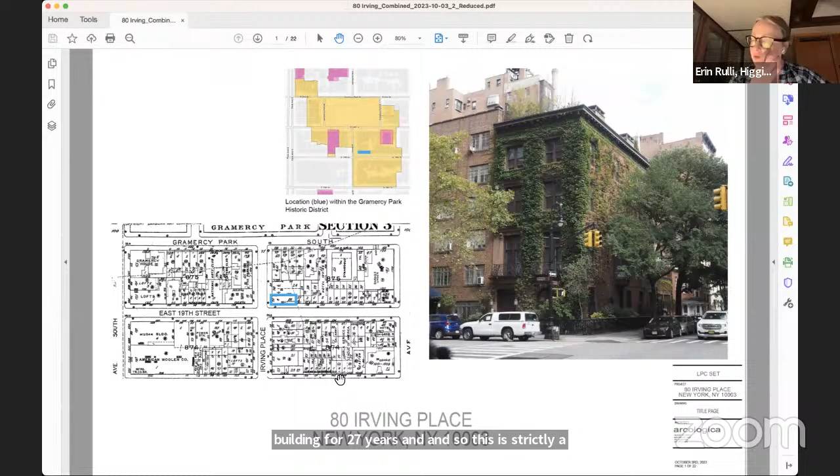It's located on the northeast corner of 19th Street and Irving Place. The scope of work includes a small rooftop addition with limited visibility and some modifications to an existing entry located on a visible secondary elevation on the east facade. We'll take a look at that. All the work proposed today is for the current owner, who has owned and occupied the building for 27 years. This is strictly a renovation for his own purposes, so there's no change in use or occupancy as part of this project.

Here we see the Irving Place facade. On the left is a 1940s tax photograph showing Irving Place. It's 2 bays wide on Irving, and on the right is the existing condition.

Here are a few more overall views. It's of course a corner building, so we have 2 primary facades: Irving Place, that 2-bay wide expanse, and along East 19th Street, a much broader facade extending back to the east. At the top of the building, it's crowned by a projecting cornice.

Along East 19th Street we have 2 very prominent chimneys extending up from the street wall at the primary facade. On the right is a view looking west from East 19th Street. These were slightly later additions to the building—the original volume was expanded by at least 1 bay in the late 19th, early 20th century.

That sort of 4-story section gives you this planar brick elevation here on the return, and then the setback 4-story portion of the building, and this single story at the base, which is currently the garage, with a projecting bay window. This was developed incrementally over time in a series of additions, but the opening we're proposing to modify is situated back here, in the nook or crook of the facade where the two facades intersect, adjacent to that bay window.

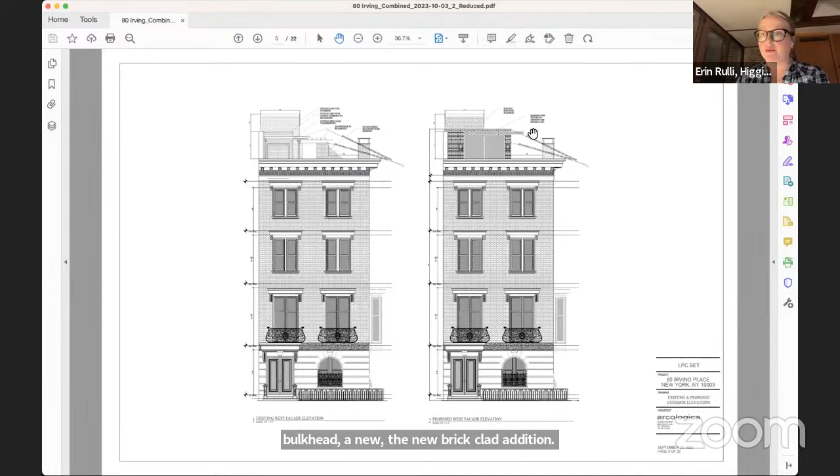Here you can see we're maintaining the existing elevator bulkhead, with the new brick clad addition. There's a brise soleil, a shading device that extends around the edge of the addition, shading the openings and providing some solar relief. That's open work—we'll look at that in more detail—and it projects about 3 feet off the face of both sides of the addition.

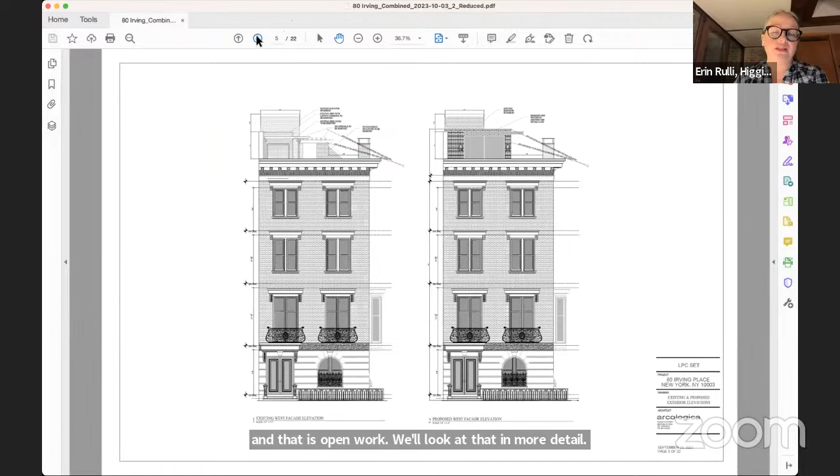Similarly, on the south elevation, the existing pergola—behind it there's a lattice screening wall separating 80 from the building to the north. At the east end of the building we have that pergola system extending all the way back here to the edge of the property, the existing elevator bulkhead, and again those two very prominent chimneys that act as a frontispiece to whatever's happening on the rooftop.

In the proposed condition, the new lattice work at the rear replaces where the pergolas all go away. There's a very simple brick volume of an addition, the existing elevator bulkhead, and the brise soleil. There's an existing mechanical setback that's non-visible, and the mechanical will all be upgraded, but the mechanical location remains the same, with some new screening device there that we see on the right.

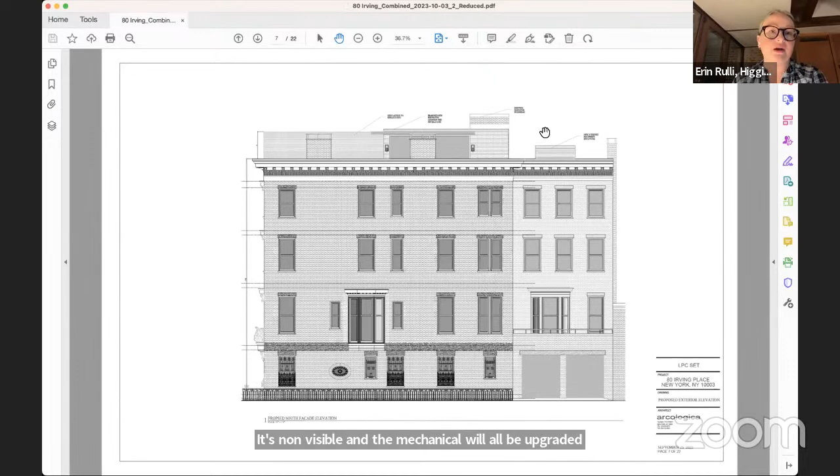This is the south elevation of the building. At the second floor, we can see the existing entryway that leads to the terrace above the garage, and the new proposed entryway that we'll look at in more detail. Up at the rooftop, in the existing condition, we see the canted roof of the stair bulkhead, the pergola system, and the existing mechanical elevator bulkhead. Then, of course, here's the new addition, the penthouse with just this simple brise soleil and the chimneys.

Out at the street wall, in the foreground, this is that mechanical enclosure. So you can see the setback from that front facade.

Here are just a couple of facade details of the proposed addition. It will be executed in a red Roman brick. As we start to look at the visibility, you'll understand that this helps it recede. There's a lot of exposed secondary and rear elevations in the context, so the red brick really mutes the addition and helps it recede into the perspective. The brise soleil will be steel, with a blackened finish. Here's that existing elevator bulkhead, and then there are some ladders that provide FDNY access across the rooftop.

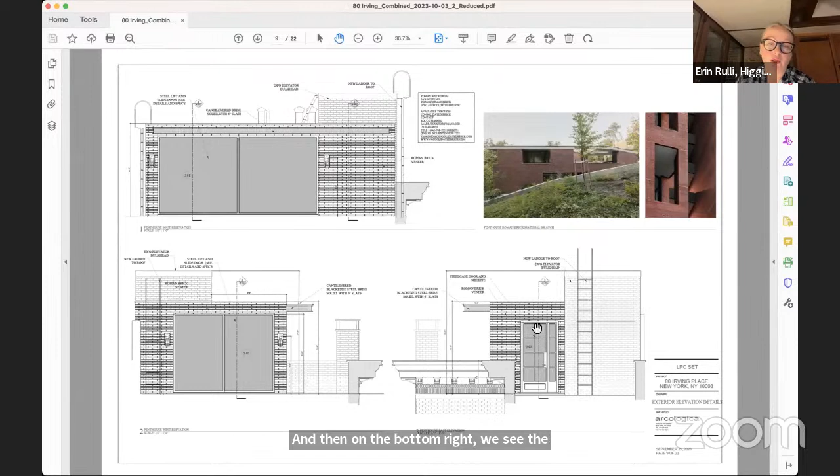Just up at the top right, these are examples of that red Roman brick that we intend to use at the rooftop.

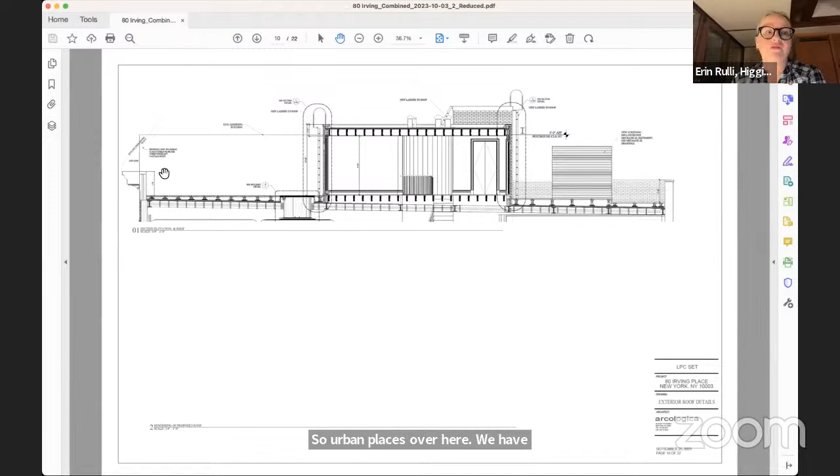Just a section across the roof, to give you a sense. Irving Place is over here. We have approximately 27 feet of setback from the front facade to the facade of the addition. It's a very limited footprint, and then that small mechanical enclosure to the east.

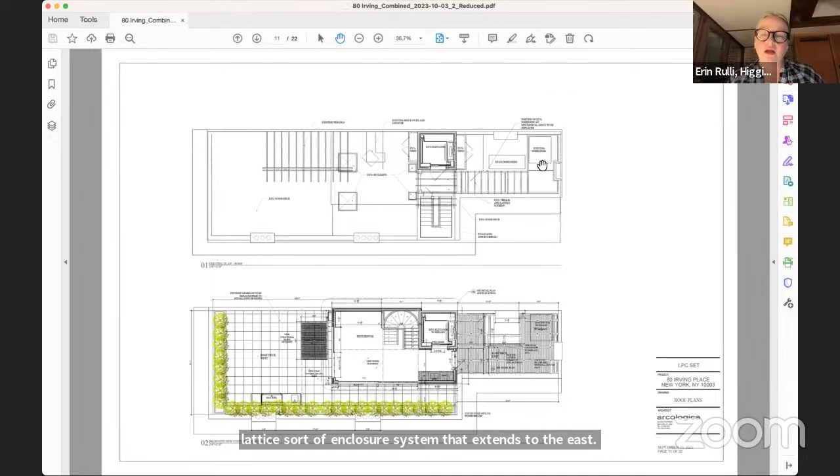Here's the comparative existing and proposed plans. In the existing plan, this is very clear, where you see the existing pergola and the existing stair bulkhead, and then that system of pergola and lattice enclosure that extends to the east, the existing mechanical equipment, and there's a hot tub, a whirlpool, at the northeast corner of the building. So that's all enclosed in that current system.

In the proposed condition, we open up that whole section in front behind the cornice and remove the stair bulkhead. There's the footprint of the addition that engages the existing elevator bulkhead, and then the mechanical area that exists today is repurposed for new mechanical systems.

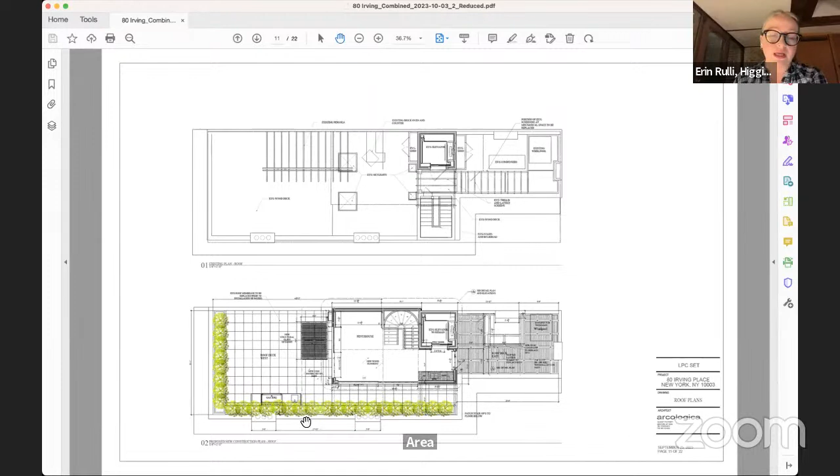We have about a 7-foot setback from 19th Street to the facade of the penthouse, but that is to the interior face of the chimney. Beyond that 7 feet, we have the full projection of the chimney and the cornice, which, as we'll see in the sight line and visibility studies, really helps to disassociate the addition from the building.

This is just the upper roof plan to show you the big moves, the overall volume of the addition, the mechanical enclosure, and then the elevator bulkhead there.

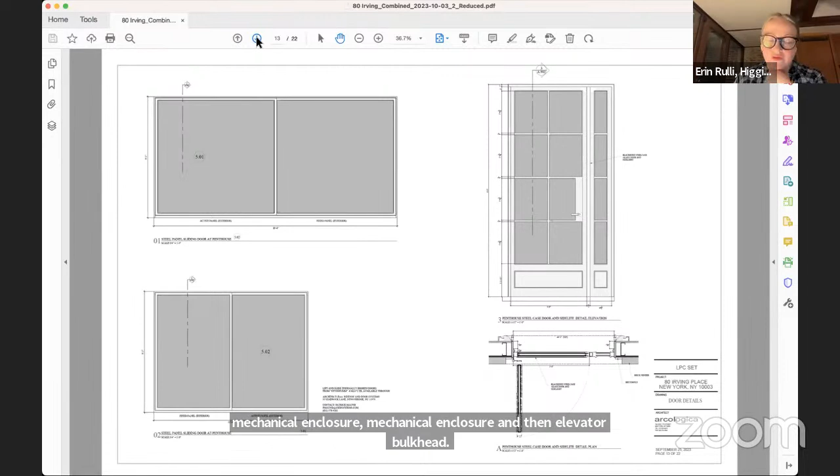Details of the proposed new infill at the penthouse: the sliding unit and the fixed unit for each of the new steel windows, and then that multi-light steel door at the east end.

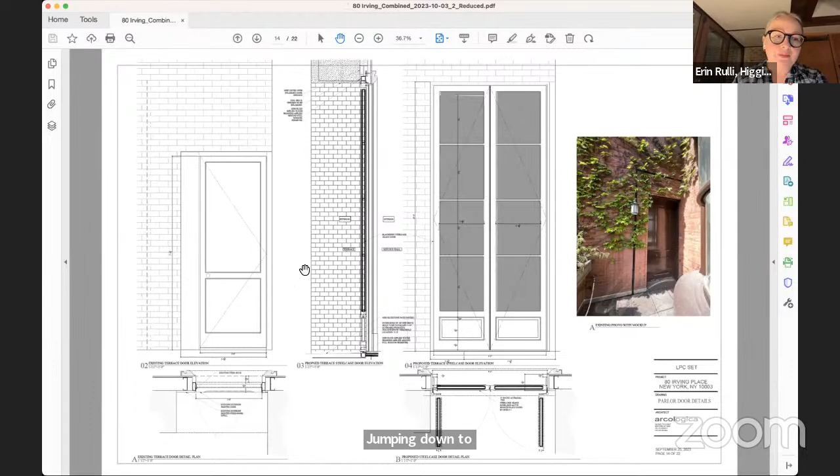Jumping down to the second floor. On the right is the view of the existing door at the second floor. It's a solid panel door within a very deep recess, a sort of planar brick opening within the masonry, with a solid panel door set within that.

You can see a black outline around the perimeter of the door, and that's the proposed new opening as it would be expanded. This is at the juncture of the two walls, the intersection of the north-south wall with the east-west wall at that setback four-story extension.

On the left we see the existing condition. The existing door opening is about 3 feet now, and the proposed is 4 feet, so we're expanding it a foot in width. It's about 7 feet tall, and we're expanding it to 10 feet in height. The concept is to keep it in the same location, just expand it so that it remains in the corner.

You can catch a glimpse of that projecting bay there. So the idea is that it tucks away in the corner and doesn't interfere with the reading of the projecting bay at all.

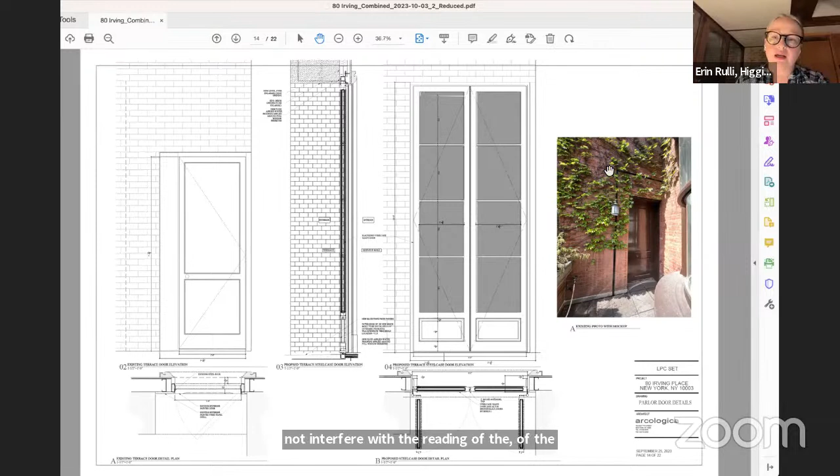It's hard to see in this photograph, but there is a ghost of an old window that exists within the brick patterning here. It's covered with ivy, and this is also above the second floor. It's completely unrelieved, so there's nothing happening, no sort of pattern for us to fall into, or that would distract from or detract from the reading of what's happening above it.

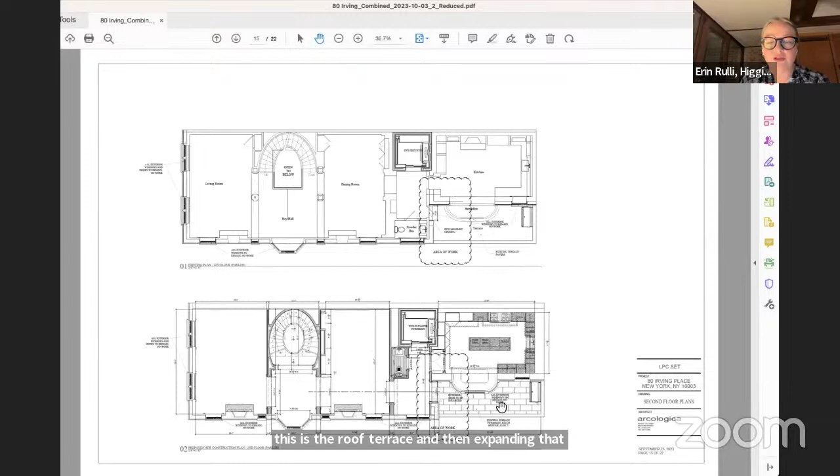Just to see that second floor in plan, that 3-foot wide opening here, this is the projecting bay, and this is the roof terrace. Expanding that opening just by about a foot provides access onto the roof terrace there. Now we're going to take a quick walk around to understand the visibility.

It's in the context of everything happening in the background, this building, the red brick of the building beyond, and behind or beyond the cornice and the chimneys, which act as that sort of frontispiece.

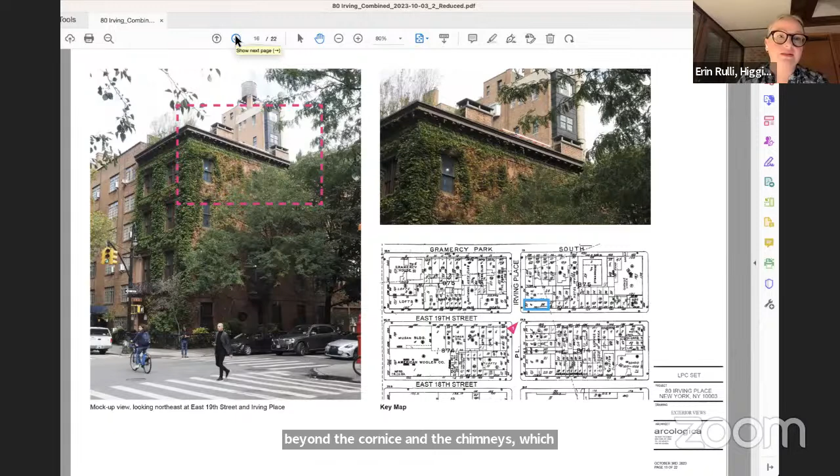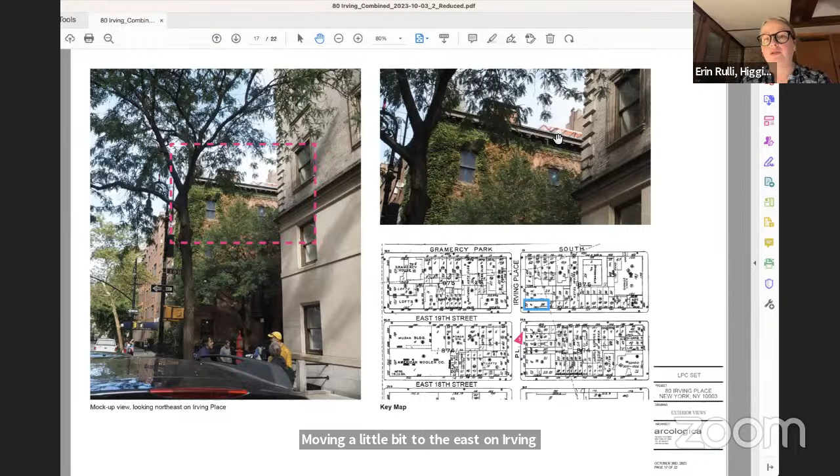Moving a little bit to the east on Irving Place, and looking up at the building just south of East 19th Street, we are going to be looking up through the Brise Soleil. Again, it's open work there.

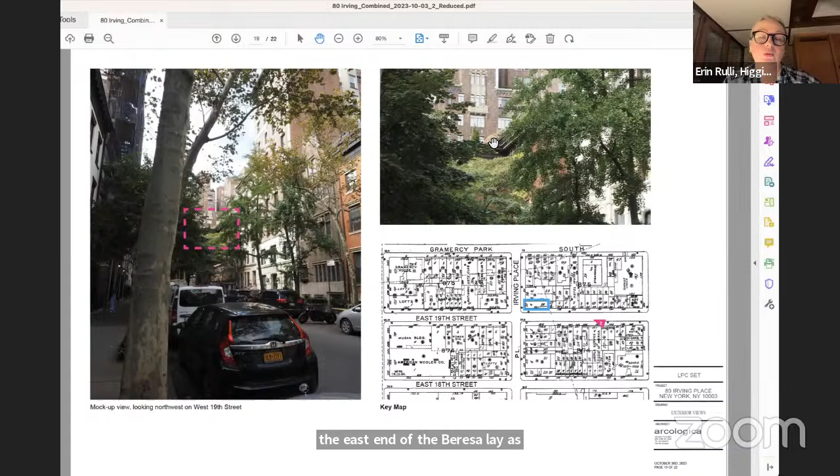Just for the sake of transparency, we've included these two views. These are on Irving Place. There's a lot of obstruction that happens on Irving Place right now. There's a sidewalk bridge, which you can see here, so you can't get a clear view of the building. There's also this sidewalk enclosure for a friend of a farmer, and we have leaf cover, tree cover.

So we expect that there is some amount of a seasonal view that would be perceptible here, but it's going to be similar to what we saw from the viewpoint to the south, where you get some amount of the brick facade at a distance, and then pick up the line of the Brise Soleil.

Here are just a few views of the mock-up as it was constructed, showing the volume of the addition with the Brise Soleil projecting, and around it the existing pergola system and the bulkheads, both the elevator and stair bulkhead.

And then here, finally, a rendered view of the rooftop, showing the very modest footprint of the new addition and the Brise Soleil wrapping the perimeter.

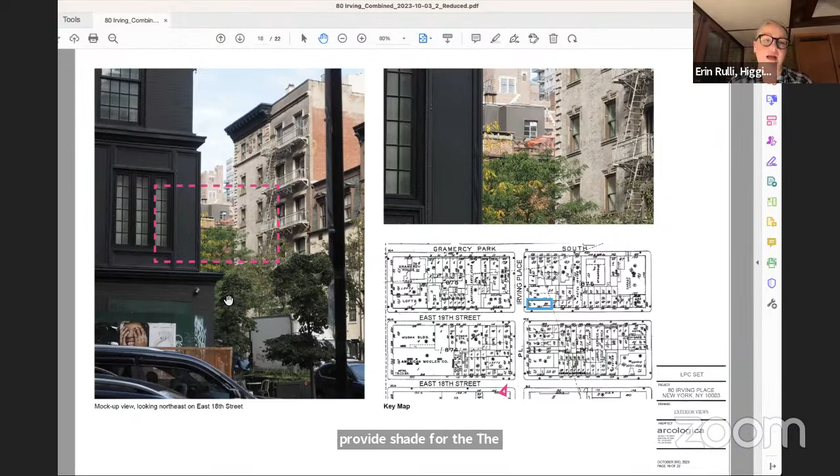I think I'd let Martin answer this. I think the intent of the Brise Soleil is to provide shade for the unit itself, the penthouse, and I don't think there would be any effects on any surrounding property.

Do you—just, I think you're muted. If you can see it, it might be creating shade. Yeah, hi, good evening. This is Martin Sosa.

I'm the architect on the project. So as far as your question about any shadows that would be created, I think given that the orientation of the building is facing south, any shadow would really be behind the structure.

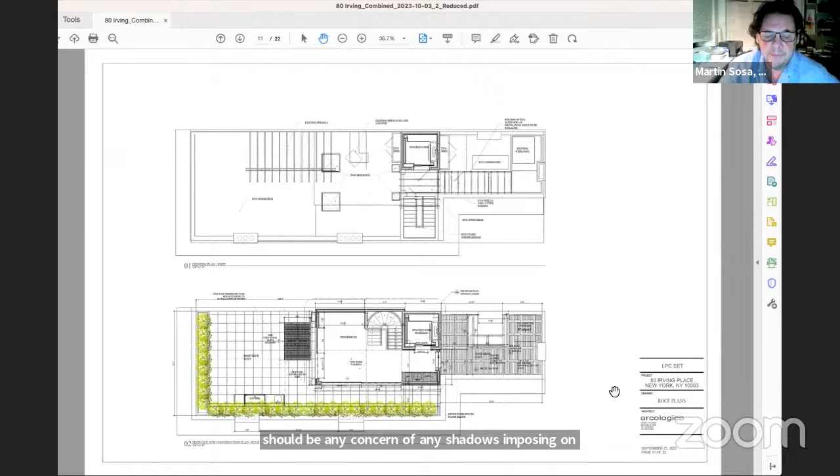Which is basically covered by the taller building. So I don't think that should be any concern of shadows imposing on the street or elsewhere. Okay. Right, because the sun's going to come over this way, right?

And the adjacent building is just slightly taller than us, which you can see in this. So we're sort of coplanar with what's happening at their rooftop.

And I have to say, my second question is, I am sad for that lovely ivy, which I am sure is not going to survive this.

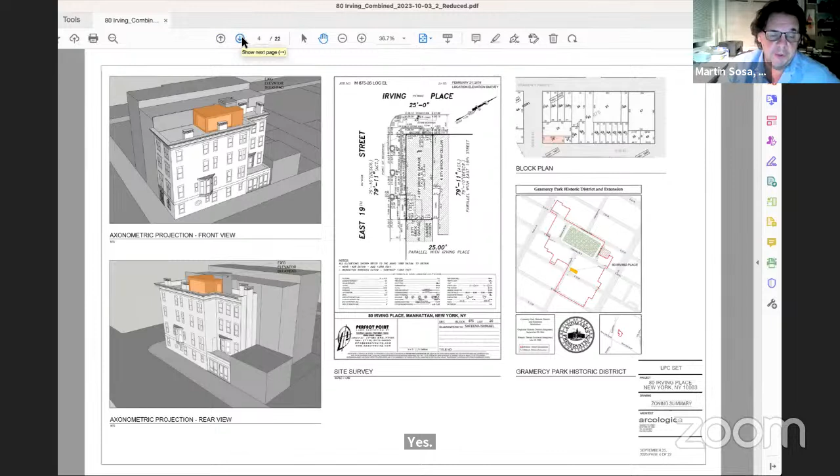Our client, the owner of the building, has resided here for over 30 years, and he's taken pristine care of this property. He's been the caretaker, and he has the best of intent.

I mean, the ivy should be landmarked itself, so there's nothing we're doing that's going to affect the ivy, as it's growing from the street level and not from the rooftop.

A lot of what you're seeing up on the roof in the photos is actually a hydrangea that's been climbing above the chimney, because of the pergola.

I wondered if it was wisteria at first. No, that's all ivy growing up from the street. Yes, and it's not—this is not...

Plan, and we're just going to—we got a question from the public. Can I just make sure one—okay, I actually have two more. One is—okay, you can come back to me. Can you do one, please?

Well, one is noise implications for your neighbors. As somebody living next to a daycare center with drum sets and two years of Local Law 11 work, are there issues about noise? How long is it going to take? Do you have mitigation?

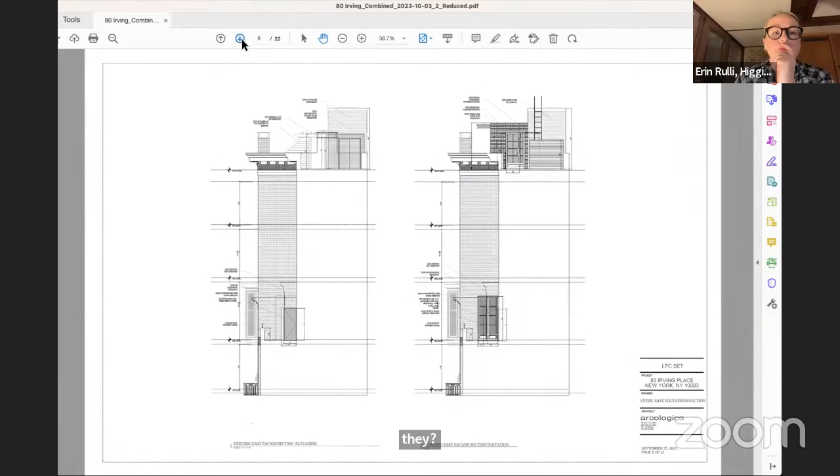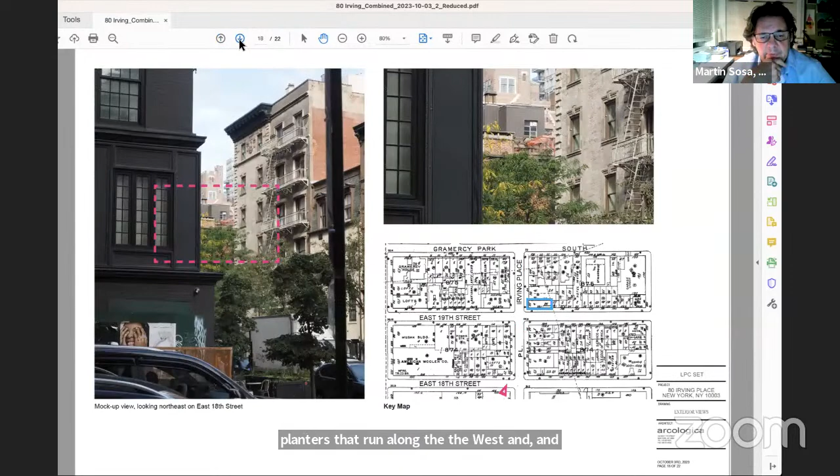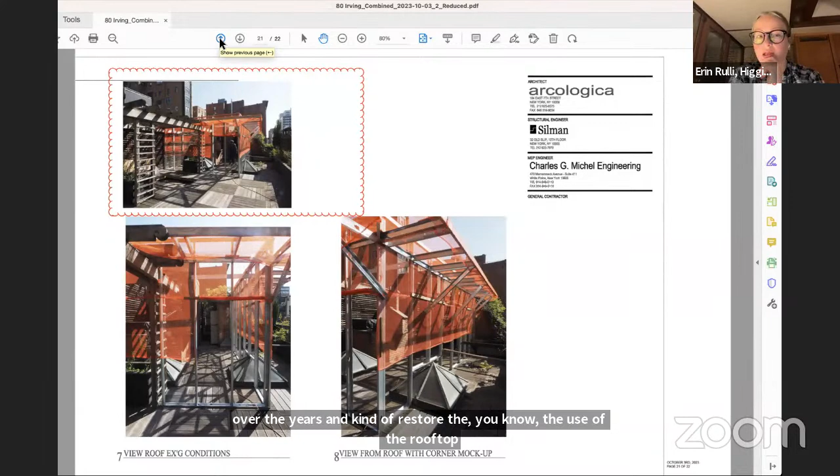There are existing planters that run along the west and south perimeter of the structure, so those are already pre-existing. There were at one point arborvitae that wrapped around the terrace, along with some hornbeams on the Irving Place facade right below the cornice. The intent is to replace what's died back over the years and restore the use of the rooftop, but the planters will not be visible. They're below the parapet line. The parapets are about 48 inches from the top of the finished deck, so the planters are only 2 feet above the deck, so they will not be seen.

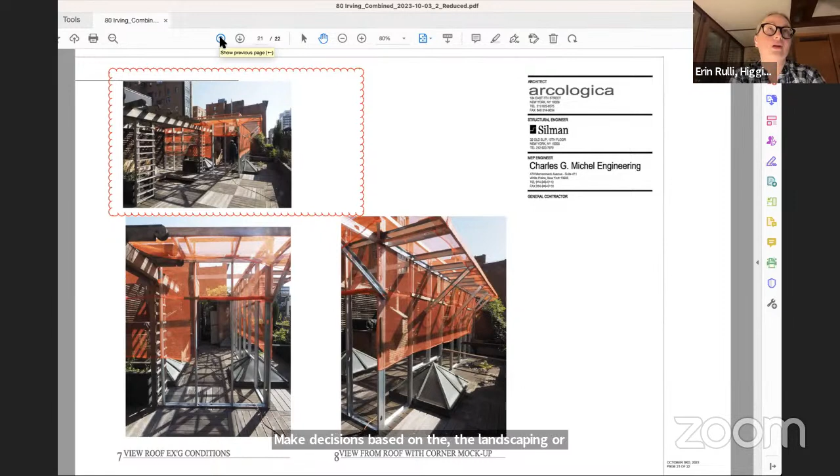In terms of plantings, Landmarks does not review landscaping or regulate planting. So while we show it in our renderings to show intent, Landmarks can't make decisions based on the landscaping or the shielding of views, and they can't require someone to maintain their plantings.

The second question is whether it's Boston ivy or English ivy, and are we sure that it's ivy. I think it's English ivy. I'm not an expert on the type of ivy, but the ivy is not going to be affected at all. We're not replacing windows, we're not washing the facade or the brickwork. The only area that might get slightly affected is where we're proposing the new opening, and there's not that much ivy within that area. It wouldn't be cut back, it would just be pulled back and allowed to regrow and reattach itself.

Are there any more questions from the public? Do our guests have any questions?

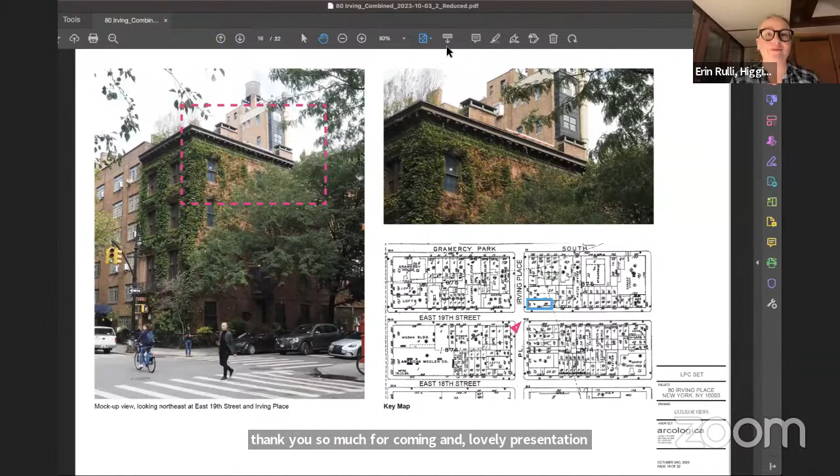Not proposing a motion, it's up to the committee. Are we in support, or would we like to propose a motion of no objection? Should we discuss it first? I mean, it's similar to the art - if we get the art, do they need something official to go to Landmarks? Support, or? And then forward. I mean, we're all fine with it, right? Do we want to support it or have no objections? No objection, I think. Support, no objection, I think.

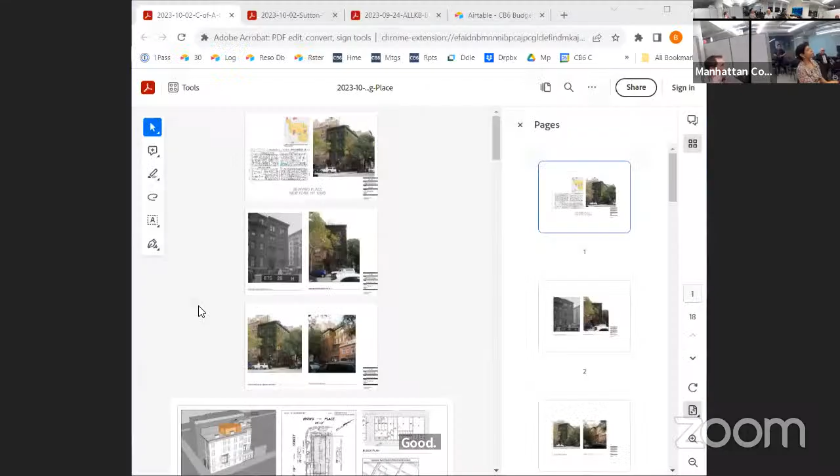Good, want us to just do it from here and speak up? Brian, would you like to stand or how would you like to do it? Yeah, if you could come up to the microphone, because they won't be visible. Okay, I can do that.

All right, Mr. Chairman, members of the committee, thank you very much for giving us the time tonight. I'm Chris Collins, I serve on the board of Sutton Place Parks Conservancy, and as mentioned I'm one of the vice presidents. The Conservancy has not come to Board 6 before, even though we have friends on Board 6, but we're very happy to be here tonight.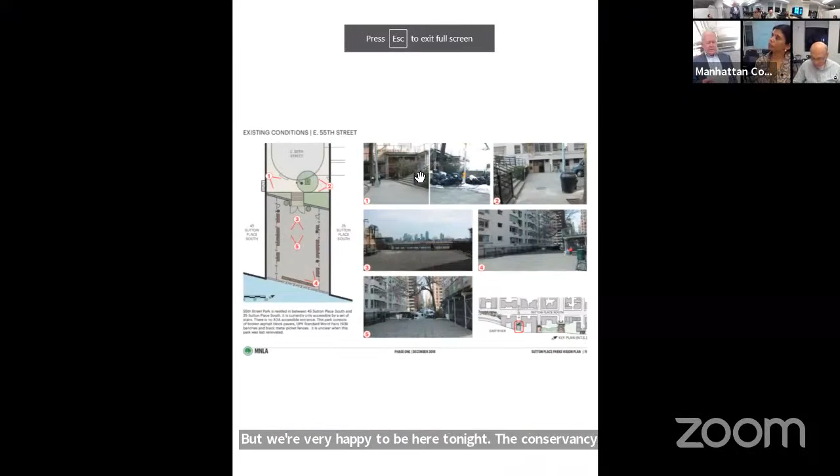The Conservancy was incorporated in May of 2015, and it was led by Pat Charlin Taylor, who's currently the president, Jack Barnett, who was the initial president, and the late Flo Kelly, who I know some of you knew. Shortly thereafter, the board was joined by Daniel, who's our treasurer, and Carol Barry, who's our secretary.

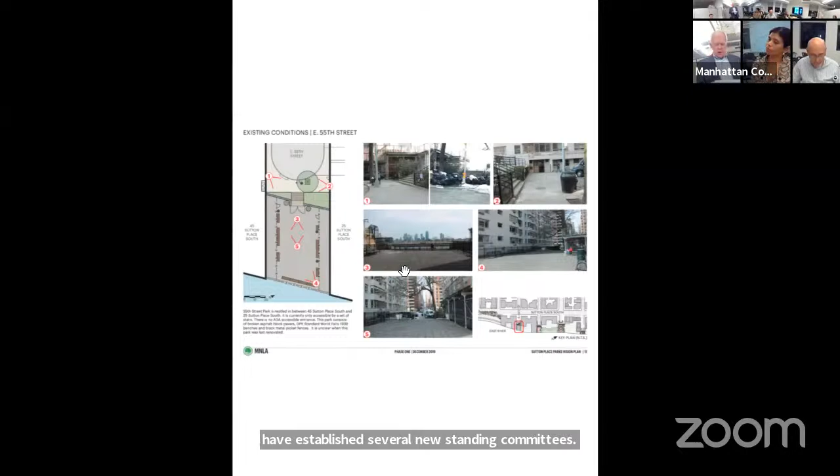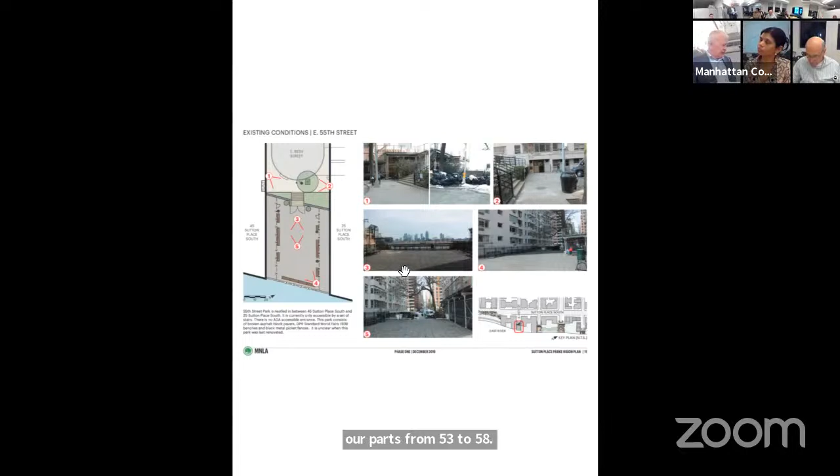The organization has grown significantly in recent years, and we recently increased our board to 15 members and have established several new standing committees. We also have a cadre of volunteers who work on all 6 of our parks from 53rd to 58th. They do planting and weeding. We have paid for irrigation systems and security cams.

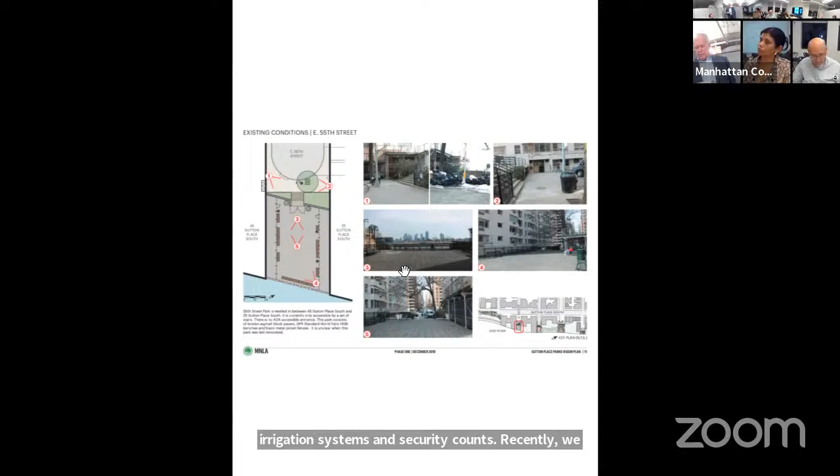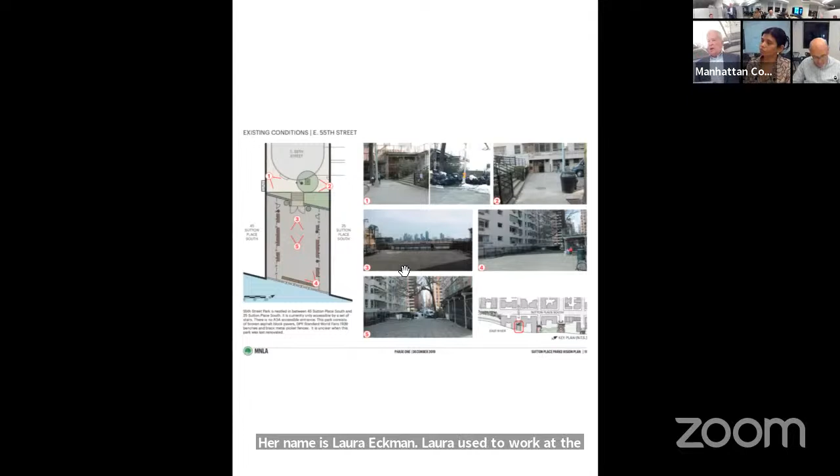Recently, we hired our first full-time employee as an executive director, her name is Laura Eckman. Laura used to work at the Riverside Park organization for Dan Garodnick, who all of you guys know. Prior to that, she worked at the Central Park Conservancy, so she understands parks vis-a-vis the Parks Department, and she has a degree in botany. So it's a big boost for us and less work for some of our officers like Daniel and Pat.

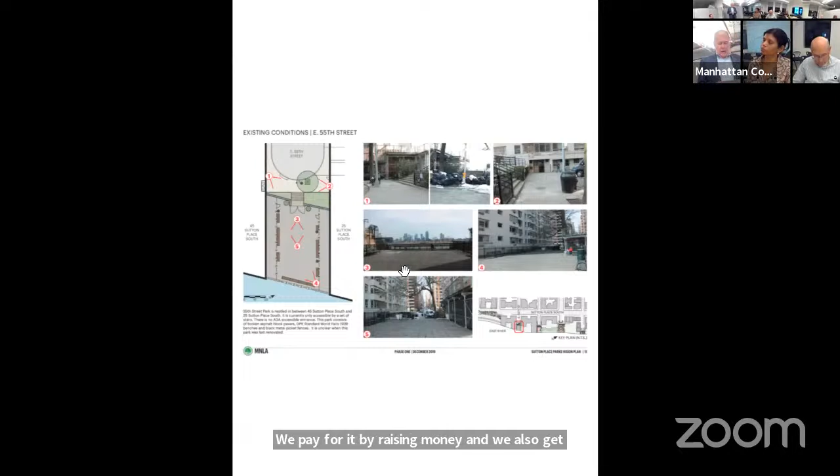I'll just quickly run through some of our programming that we do in the course of the year. It's all free, we pay for it by raising money, and we also get sponsorships from local businesses. In the summer, in August, we have children's storytelling once a week, the same day of the week. We've had as many as 80 children and their caregivers come for storytelling.

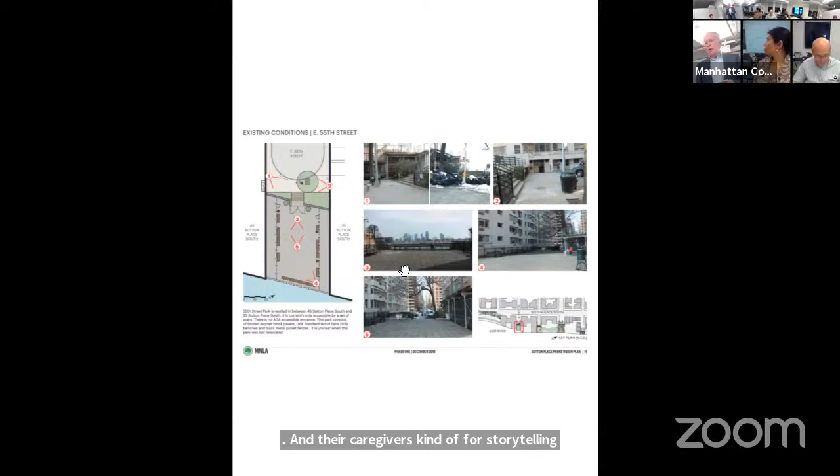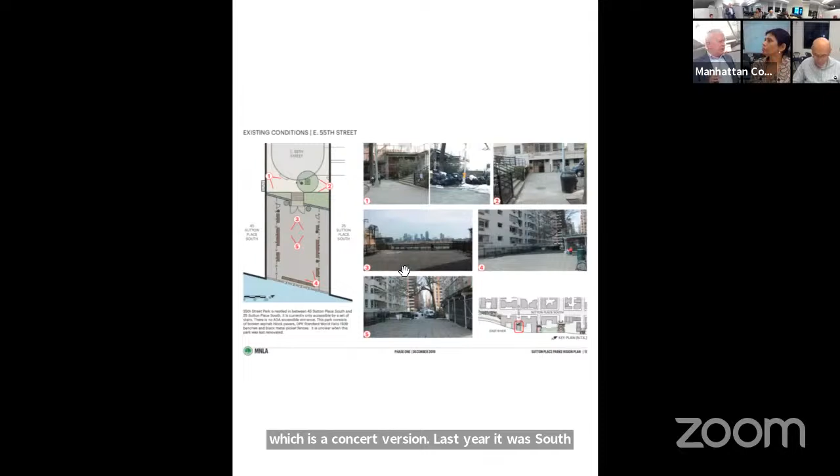The last 2 years we have done Broadway on the River, which is a concert version. Last year it was South Pacific, this year it was My Fair Lady. I don't know what we're doing next year, but try and reserve tickets far in advance. We had a 28-piece orchestra and more than a dozen singer actors, it was wonderful. We do a holiday sing-along in December.

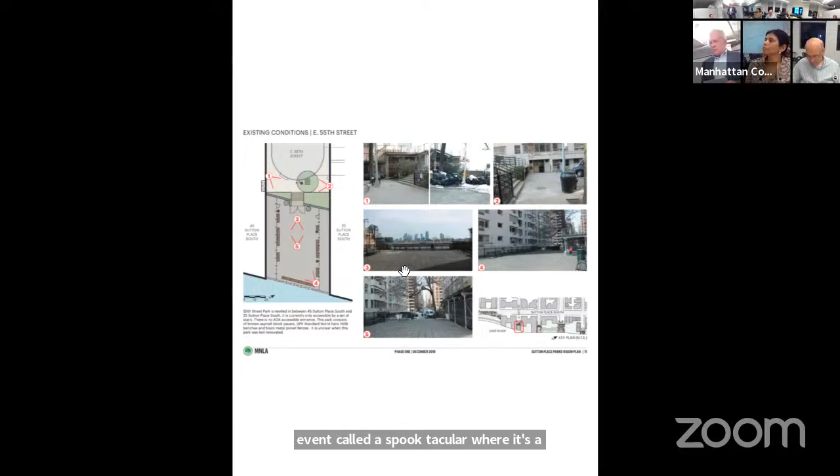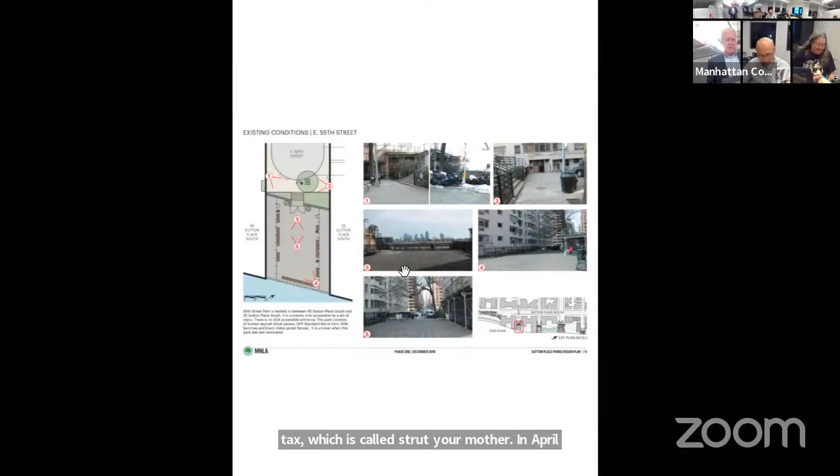For Halloween, which is coming up, we do an event called a Spooktacular, where it's a children's costume parade, and then a separate parade for people's pets, which is called Strut Your Butt. In April, we do Earth Day, which is heavy on educational materials for children. And then in July we do Manhattan Henge, that's when the sun lights up on 57th Street, and we just come out and have a party. People bring ladders and try and take fantastic pictures.

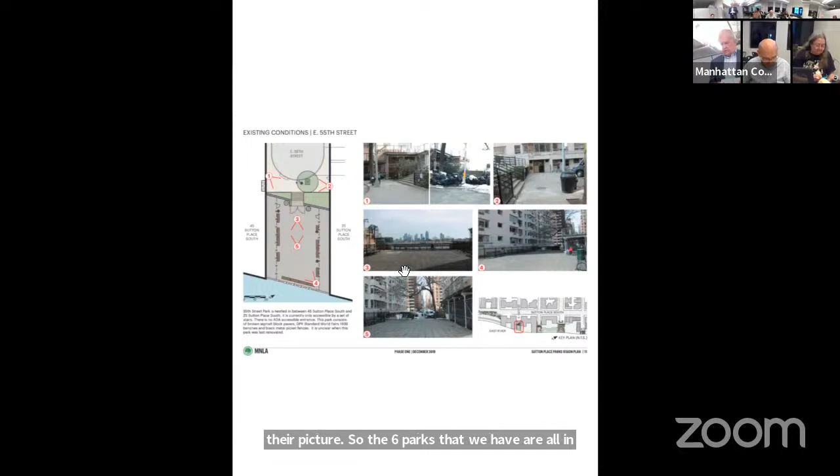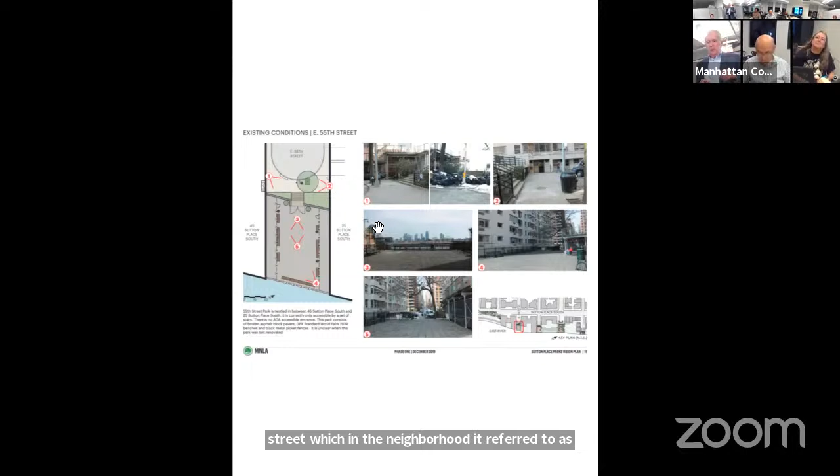So the 6 parks that we have are all in relatively good condition, I'm happy to say, and I thank the Parks Department for a lot of that work. But we have one, it's the dead end or the cul-de-sac, if you want to be fancy, at 55th Street, which in the neighborhood is referred to as the jail yard. There's a picture of it in the materials we brought you today. It attracts some, let me just say, undesirable elements. People who have recently thrown a park bench into the East River from that vantage point, lots of smoking of cigarettes and weed.

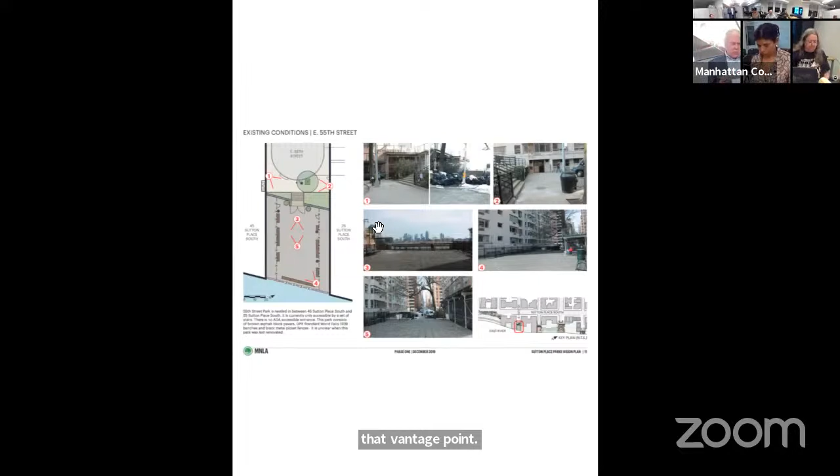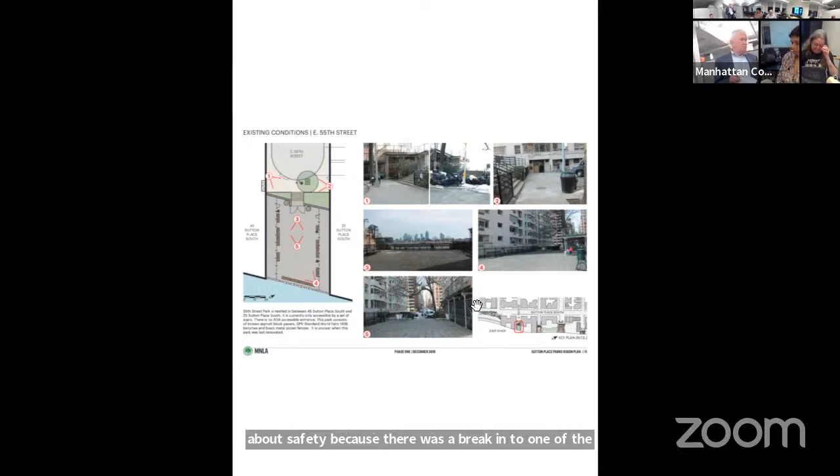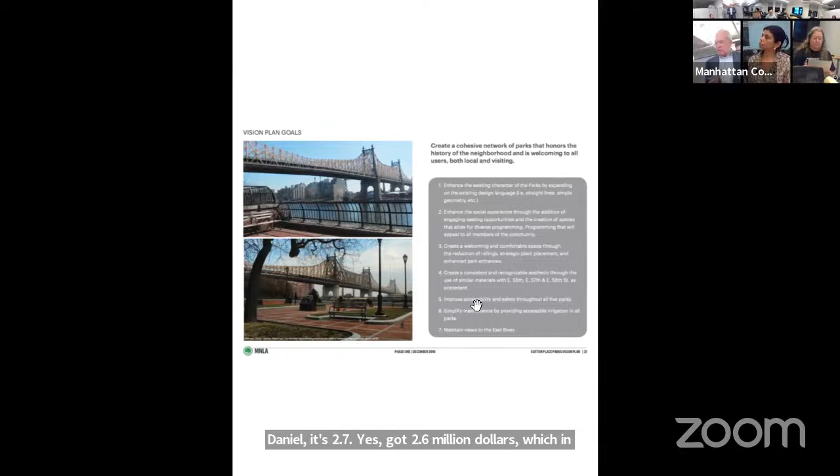The 2 buildings on either side, 25 and 45, are very, very concerned about safety, because there was a break-in to one of the buildings from the park just about a month ago, maybe 6 weeks. So we're coming to you tonight to ask for the board's support in our request, which we have submitted to the Parks Department for approximately 2.6 million dollars. Daniel, is it 2.6? Yes, about $2.6 million, which in the world of parks capital projects is not a huge number, as you guys know. Sounds like a lot of money to me, but I'm going to ask Daniel to come and give a presentation on the particulars for this capital budget request. And thank you again for having us.

All right, thank you. Thank you.

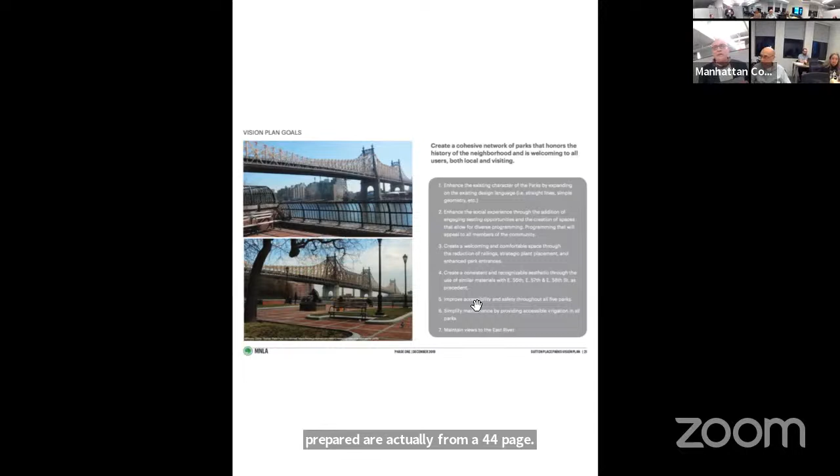The slides and the pages we prepared are actually from a 44-page vision plan that was prepared, and just a little background about how that happened.

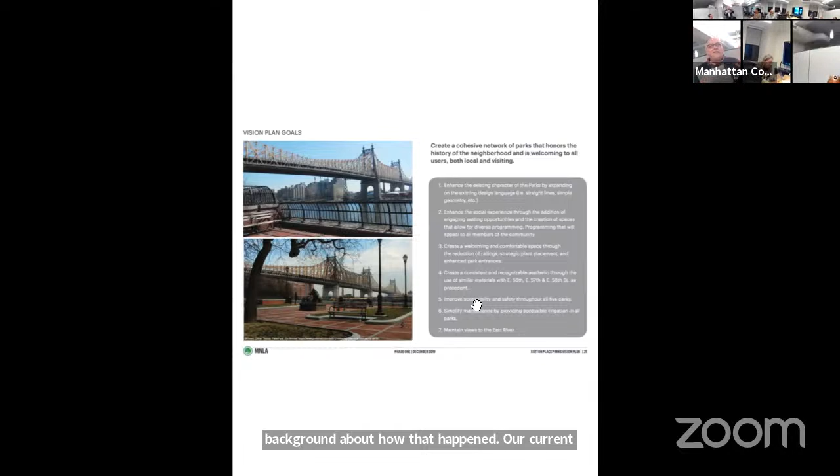Our current president, Patricia Charlin Taylor, had the vision and desire to hire the best landscape architect that she could find, and find a way to take these 5 parks and give them some kind of integrity, so that no matter which one you're in, you feel that you're in a Sutton Place Park.

So she connected with Signe Nielsen, who at the time was president of the Public Design Commission, and is the founder of Mathews Nielsen Landscape Architects, and discussed it. She then encouraged us to set up an ad hoc vision committee.

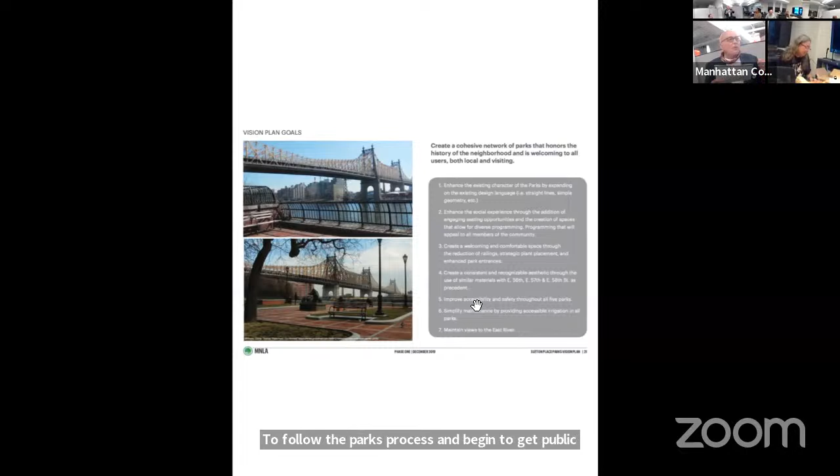15 people got together, and it lasted for almost 2 years, this committee, to follow the parks process and begin to get public input through questionnaires, through guided interviews with a form that volunteers would have on It's My Park Day, to collect data on what people are doing in the parks and what they want to do in the parks. And then miraculously, money we had been looking for years.

Adam Novak left an endowment in honor of his wife, Branka Novak, but we couldn't find the money. Then we got a call from the City Parks Foundation. We've had this money for 20 years, but we didn't know, for the parks to take care of them in perpetuity, but we didn't have anyone to connect to. And so suddenly, it had grown, it was $80,000, now it was 200,000.

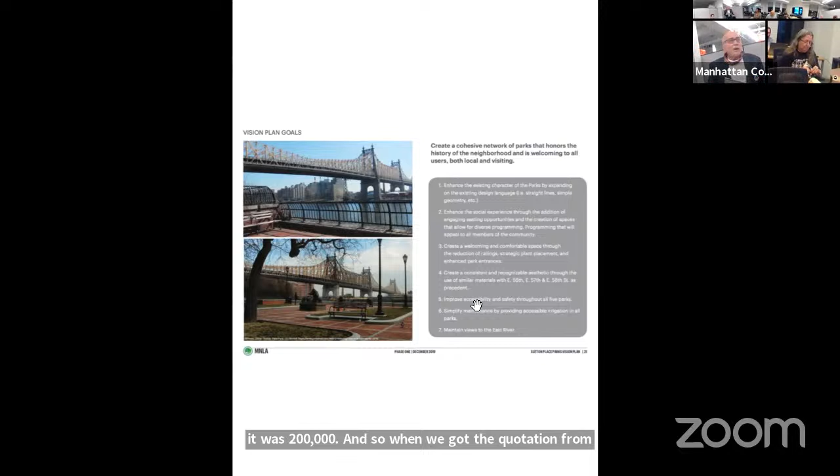So when we got the quotation from Mathews Nielsen to do this entire process, it was going to cost $110,000. We went to the Parks Foundation and said, we think this is the way to perpetuate the parks. And they agreed, so we only paid the first part to generate this quotation.

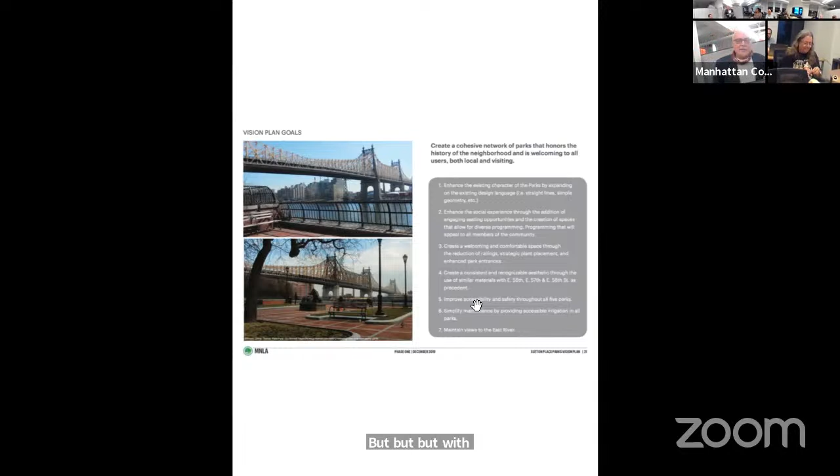And then we received this wonderful money that in a sense is ours to spend. I like keeping it with them, because if it's with me, it's just going to be in a CD at up to 4%, but with them, it more than doubled because they invested it. So it's fine that they keep it and that we have to actually ask and convince them.

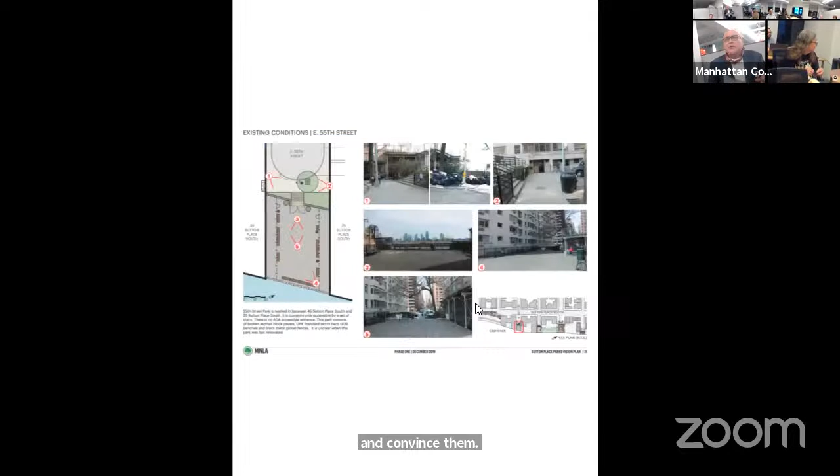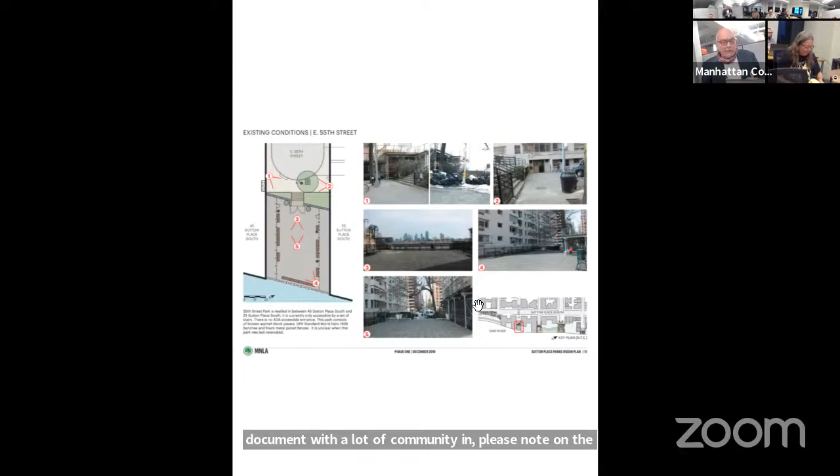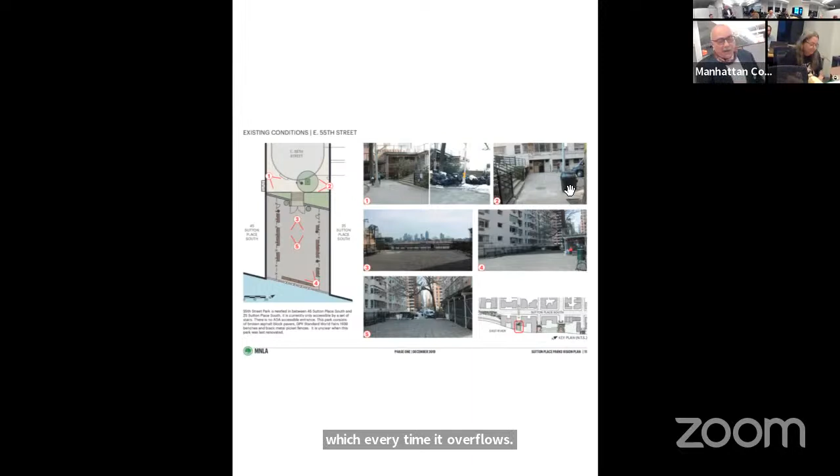The first slide that you saw, so we produced this document with a lot of community input. Please note on numbers 1 through 5, there is a garbage problem. In the first picture, you'll see Cannon Point North and Cannon Point South, otherwise known as 25 and 45 Sutton Place South, have to stage their garbage in this cul-de-sac before it's picked up. In addition, we have this open can in picture number 2, which every time it overflows, we have a rat infestation problem annually in the 2 gardens on the 2 sides of the staircases.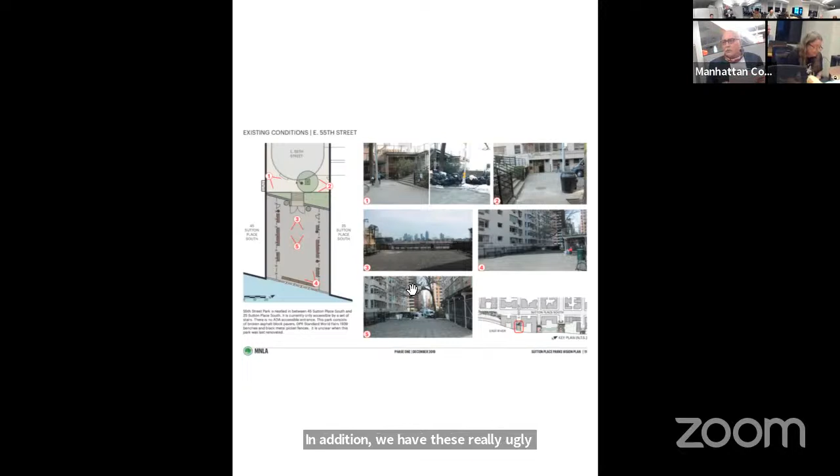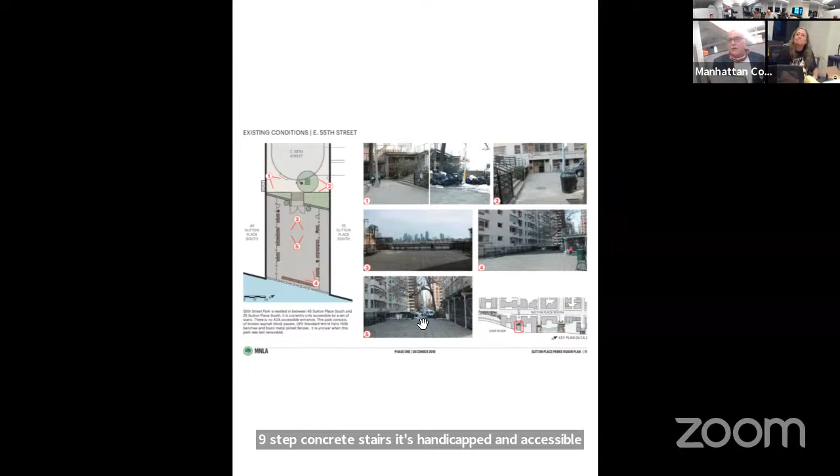In addition, we have these really ugly pavers that we're not allowed to cover or do anything with because of the 9-step concrete stairs. It's handicapped inaccessible. So what we've done since these pictures is put 10 fiberglass self-watering planters that are very hard to move. So at least there's some greenery and some summer flowers, but it's just a stopgap until we can really do something.

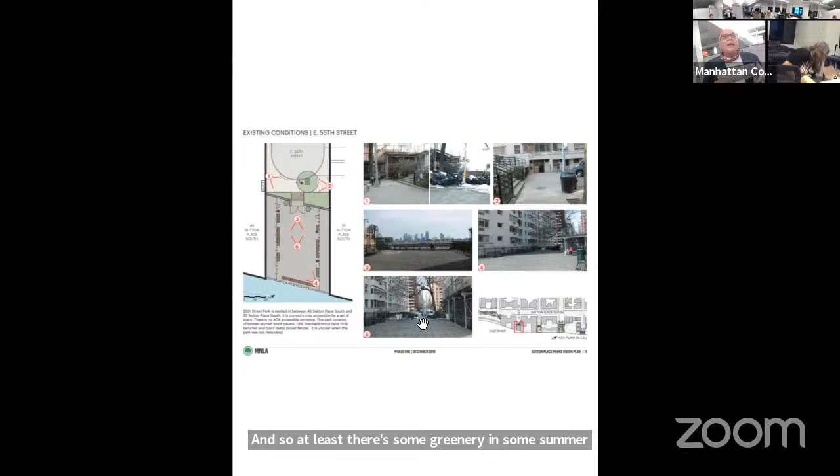In the second slide are the overall goals that we set with Mathews Nielsen for this vision plan: enhancing the character of the parks, creating social experiences, and creating community.

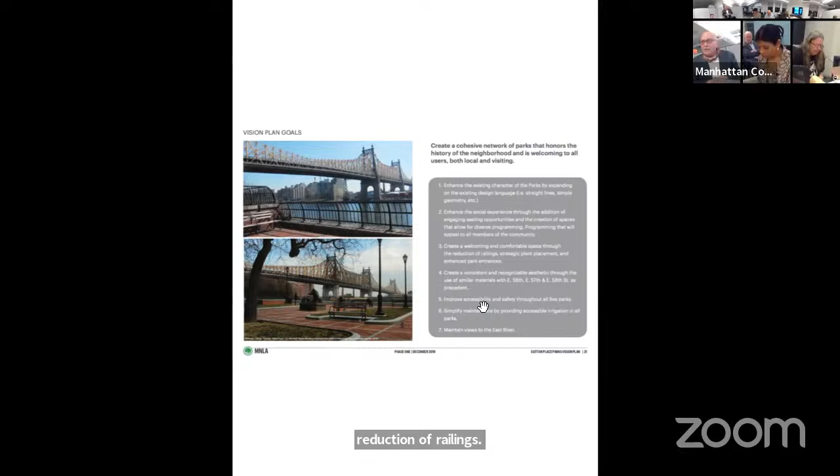But there is a little bit of a conflict between goals 3 and 5. Create a welcoming and comfortable space through the reduction of railings, but also improve accessibility and safety. So we know that there is going to be some healthy argument about how accessible and how closed this park should be. We are counting on the Parks Department to have those community meetings and let them duke it out. That's not what we're trying to do here.

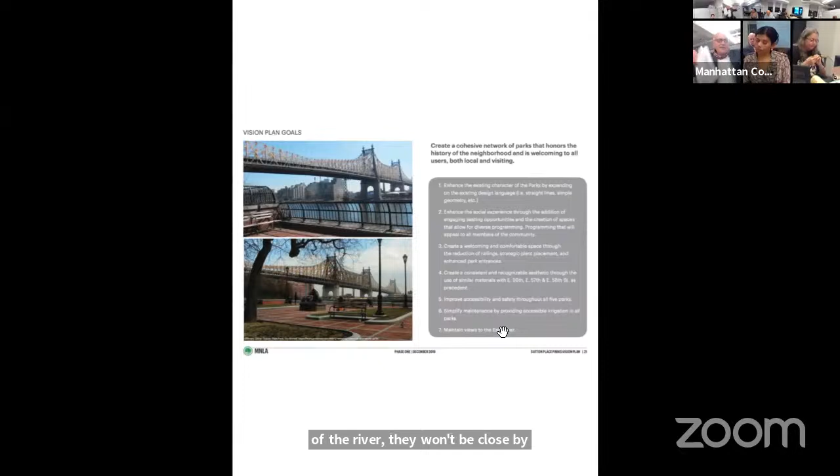What we do want to make sure is that the beautiful views of the river won't be closed off by a line of 1939-style park benches. You'll see soon what we're going to do with that.

Then you'll see the rendering, or actually the drawing, of what we'd like to do. This is the only part I'm going to read out loud.

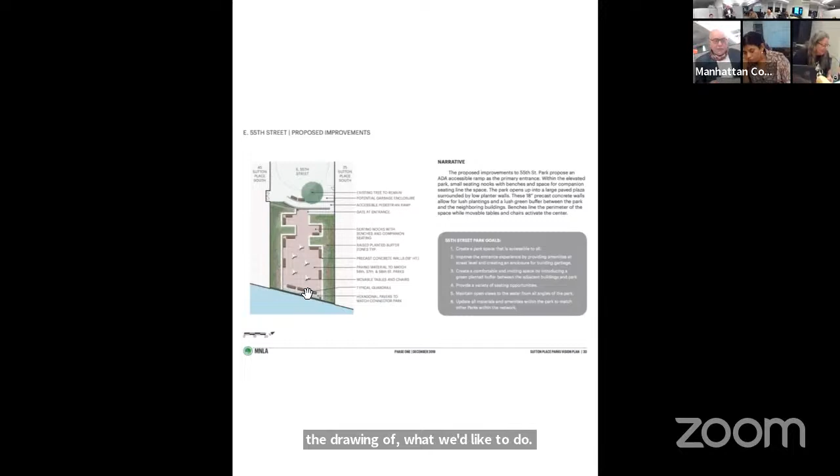The proposed improvements to 55th Street Park are an ADA accessible ramp as the primary entrance, within the elevated park, small seating nooks with benches and space for companion seating lining the space. The park opens up into a large paved plaza surrounded by low planter walls. These 18-inch high precast concrete walls allow for lush plantings and a lush green buffer between the park and the neighboring buildings.

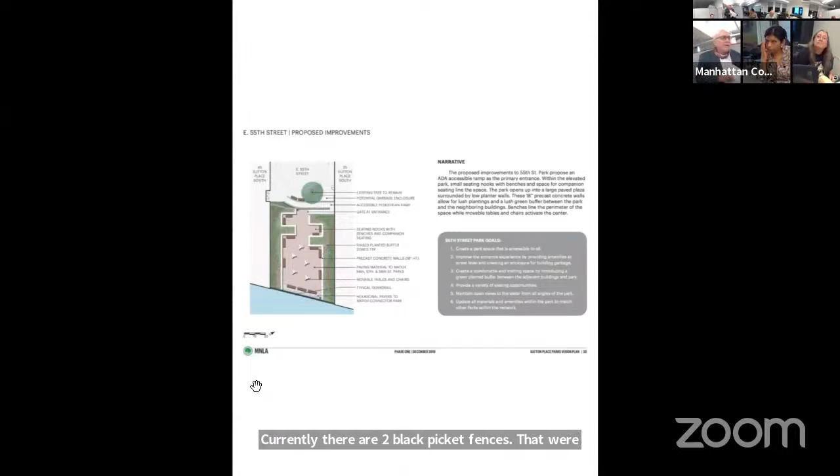Currently there are 2 black picket fences that were built as dog runs, one for big dogs, one for small dogs. No one remembers this, but they're still there. The dogs became a nuisance and they had to end that.

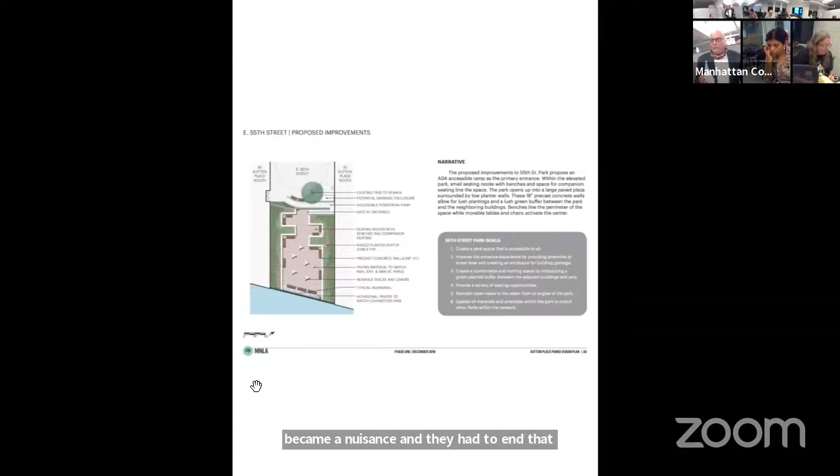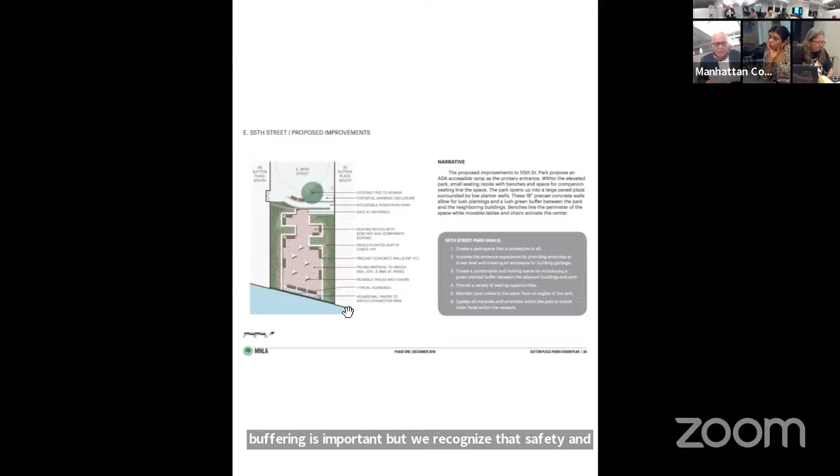I'm sure the buildings like the idea of a buffer, and our buffer would be beautiful and very difficult to cross to do graffiti on their walls, which has been done. So we recognize that safety and buffering is important, but this solution would be very difficult to traipse through to get to the walls, yet it's still enjoyable and nice to look at.

Another thing we're going to do while doing this is install a water supply so that we don't have to steal or borrow water from the neighboring buildings every time we want to water a plant.

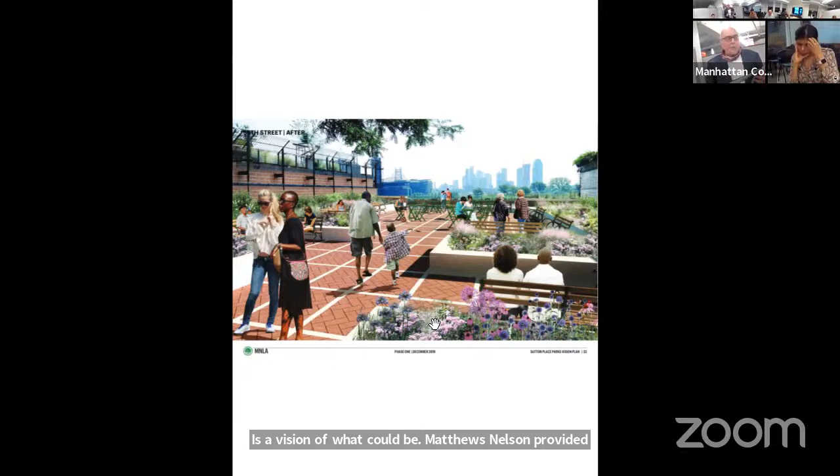Mathews Nielsen provided in 2019 a budget which was about 1.5 million. They've recently updated it on the last page. I confess that when I saw only 900,000 was for bricks, mortar and labor, and 1.6 million or 7 was for contingencies and oversight, I was taken aback, and I even mentioned that to you when we talked on the phone. I was since reminded that this park is over the FDR.

That 8-year project called the Promenade, from the Grand Bargain that Julie Menin orchestrated with #1 Sutton Place South, and the 8-year later opening of the park — 2 of those years involved New York State Department of Transportation. So it's legitimate, it's really covering a freeway, and they may have restrictions on what hammers you use, I don't know. So there's plenty of money in there for that contingency, and also 15% because we know nothing's going to happen this year or next, so we have to allow for increased price.

We are requesting that in your budget guidance, you include 2.6 million dollars for this lovely transformation. It will never be called a jail yard again. Thank you.

So the request is that we support your request to Parks for 2.6 million. That's correct, we have submitted this to the Parks Department already, and what we hear is simply that it's under review. We have also gone to, under the current city council district lines, 55th Street divides Keith from Julie, so we've gone to both of those council members as well. We're just trying to close the loop here and ask for the support of Board 6.

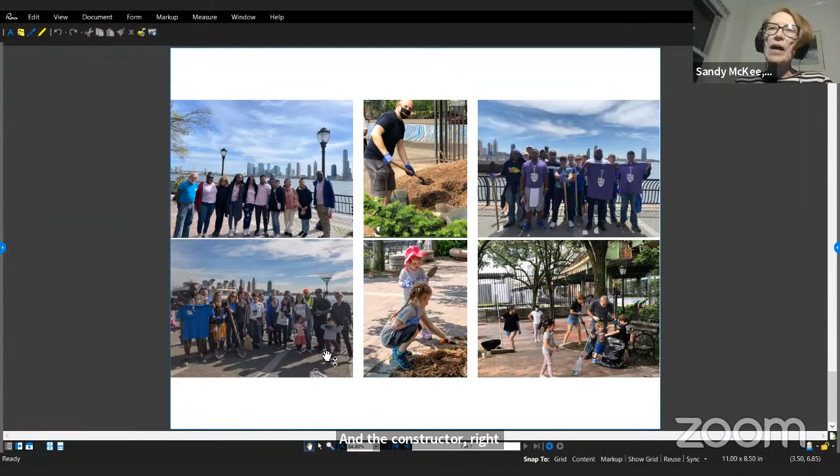Yeah, go ahead. Sandy, so we don't know the budget for just the irrigation and the reconstruction, right? We don't know. If we go back, like on the tracker, it says it's greater than 10 million for the reconstruction, but we don't know what the irrigation is. We've had sort of off the cuff estimates of maybe 1.2 million, 1.3 million. Without a little bit more investigation, I'm not sure we'll know.

Sure. But without doing the substrate reinforcement, don't they have to do that anyway, or else it's just going to all fall into the East River?

Basically, it will eventually fill in. We have sinkholes currently that are covered, luckily there's matting covering it, and they do tend to fill them in. There's an exercise section with different equipment people can use, pull-ups, and that's sinking too. It's been doing that for years, and it looks like it's getting worse. That's what someone else said too - it's always been like that. When you step on it, you think, ooh, it's gonna go this way.

It's getting deeper, and Board 8 had a problem where it actually probably collapsed 15 years ago. I don't know if we still have in our records the presentation they made in June of 2021, because it was really quite interesting - the different proposals they had. They believe they can do this from below, so they wouldn't actually have to dismantle the park. It's quite interesting, the proposals that they had, and apparently that would be the most cost-effective way to do it.

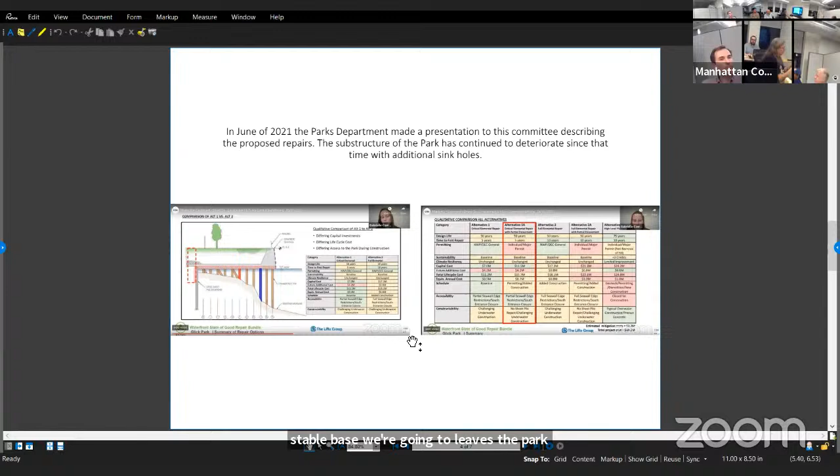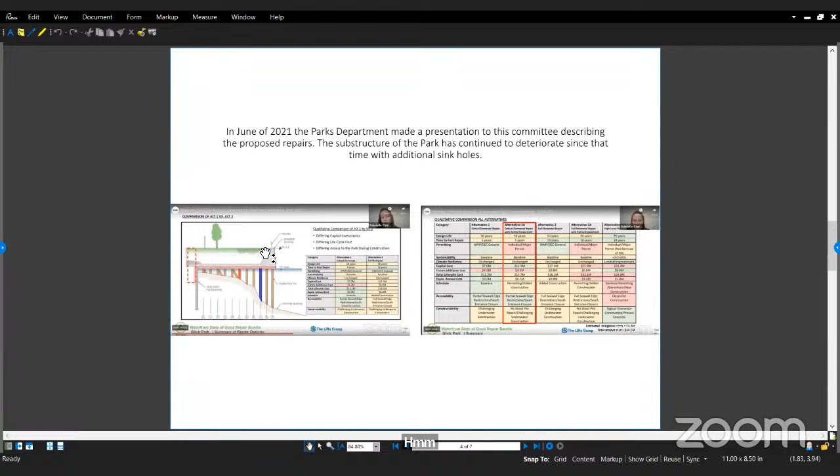We have a question from Rupal Kakad. Sandy, I have a really quick clarification question - when you say fountain, are you talking about a fountain for show, or more like a water fountain? Because that's the part you mentioned, and that's my usual running route. I'm always wishing there was a water fountain for me to drink from, especially on sunny, warm days. So which water fountain do you mean? I'm sorry, it's just a clarification question.

So you mean drinking water? Yes. Right now we have the fire hydrant, which is not potable water. And the fountain that is there, we tried to get it repaired before Hurricane Sandy, but the pipes and everything were just so bad, they kind of gave up on it. We now plant things in the middle of it, so it doesn't look too bad, but it definitely is not a fountain with water anymore.

Is there any - looks like we have one question from the public. Yes, a question from Elisa DeVito. She says, similar to Alliance for Kips Bay, Friends of Ralph Bunche have been working to get water at Ralph Bunche Park. We were working with Parks on a temporary phase 1 above-ground irrigation system relying on a hydrant. Unfortunately, we were denied a grassroots grant by the City Parks Foundation, but we're working on alternate sources of support. It seems Ralph Bunche has been slated for a capital project for some time, at which point a water line could be added below ground, but we're looking for an interim solution - we would just need the hydrant functioning and ask for support in getting this to happen. I will reach out to her because we do have a functioning hydrant that we are able to open. It's a very long park, and we're never quite sure if FDNY really appreciates us utilizing the hydrant, but if that's an option, we certainly would look into it as a short-term solution.